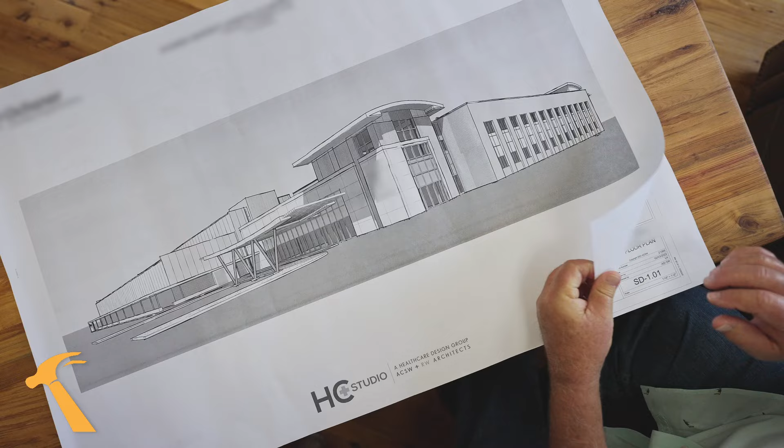Yeah, so Robert, let's talk about the project. Very excited to be a part of it. We've had a lot of discussion for the last 6 months about this project. I've built a lot of medical facilities in the past, but this project is far different since it's much, much larger.

And being that it's a renovation, creates some other challenges. It was part office and part industrial. We had to remove the printing press, so that was a big challenge in itself. It's construction. You guys do it every day and I do it every day.

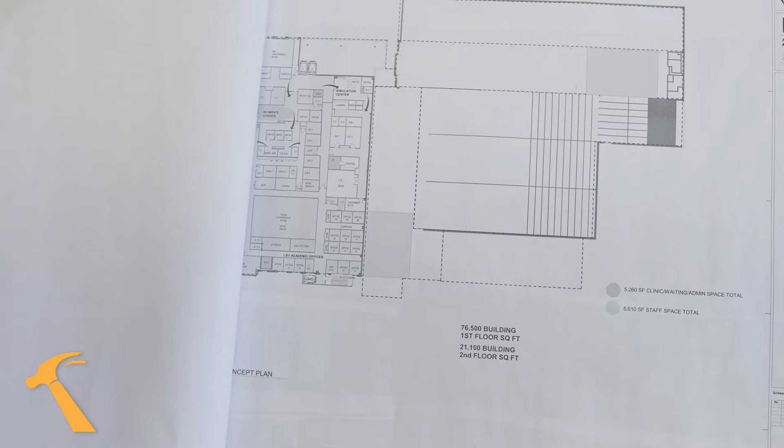I'm just on the other side of the fence from you. I know it's going to go well. I know we'll deal with the challenges. The city of Lafayette's easy to work with. So it gives me a good level of comfort dealing with your team and the team of architects and the team that we're involved with the tenant. Everybody knows what they're doing, what they're supposed to do, and I'm very familiar with most of the subs. So I think it's going to be a great project.

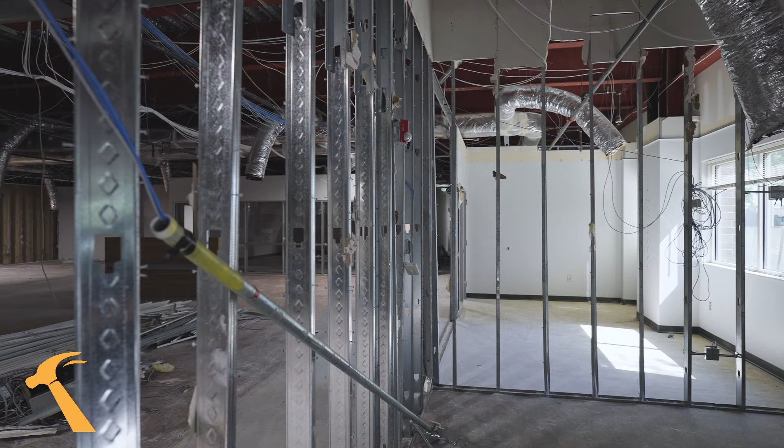I think it's going to come in fine, on time. I think we're ready to rip and roar, you know, and we've got the building almost gutted, so to where we need to be, so we're ready to go back up.

One of the things you said that really resonates with us is the subcontractors and trade partners and the team approach. There's going to be some complicated space in there for sure, just because of the nature of the medical facility. We're salvaging a building instead of tearing it down. And we're going to end up with a new roof, new air conditioning, new wiring, with the latest and the greatest equipment. So to me, this is going to be one of the most up-to-date modern facilities when we're finished here in about 18 months.

Absolutely. So I can't wait for the 18 months to come by for us to cut the ribbon with the tenant. That's the fun part, you know, walking in and seeing that end product and use and function the way it should, and knowing that we did everything we could as part of that team to make that happen.

Everyone involved in the project is anxious because they need the facility. Those people who are going to actually work in the facility are involved in the design stage, and I'm sure they're going to be excited when they really see something going back up.

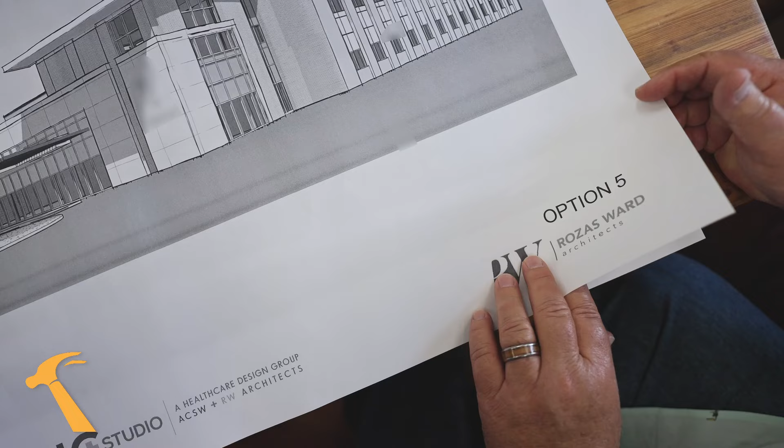Absolutely. Let's take a look at some of the basic concepts in this floor plan. One of the things that you mentioned was removing the printing presses, you know, and this is the first time I've interacted with a facility that had equipment like that.

We know for the first few weeks of the project, we're going to be working a lot in this back area to really fill some of those holes and embeds and really prep that space so that we can then frame the walls for the project.

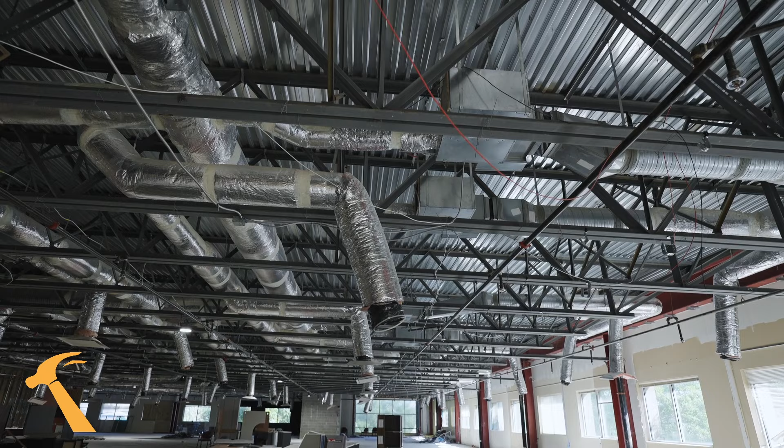In this printing press area, some of the concrete's 2.5 feet thick. That's a thick slab. That's going to create some challenges in itself for the plumbing. But with that said, we will have the most modern, environmentally friendly air conditioning system and of course the most modern, up-to-date LED lighting. So there again, the energy efficiency of this building completed versus as it was when we purchased it, is going to be completely different.

I've been involved from the ground up with the architects, and they spent a tremendous amount of time and energy and effort figuring out the flow. And what I mean by flow, the people flow. How big are the waiting rooms today versus how big were waiting rooms in the past?

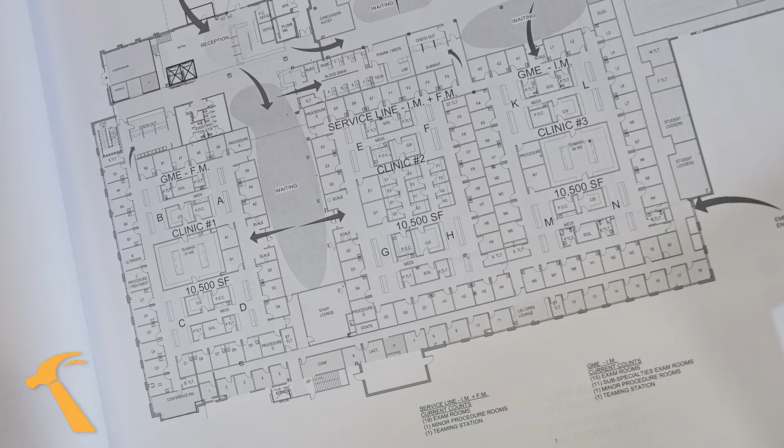We're working with a team that represents the tenant, and they're very sharp. They understand what they need, and they're conveying what they need to us, and so we can deliver the product. And that's honestly one of the hardest challenges on a medical building is the space constraint. So many regulations around the size of room, the layout of that room.

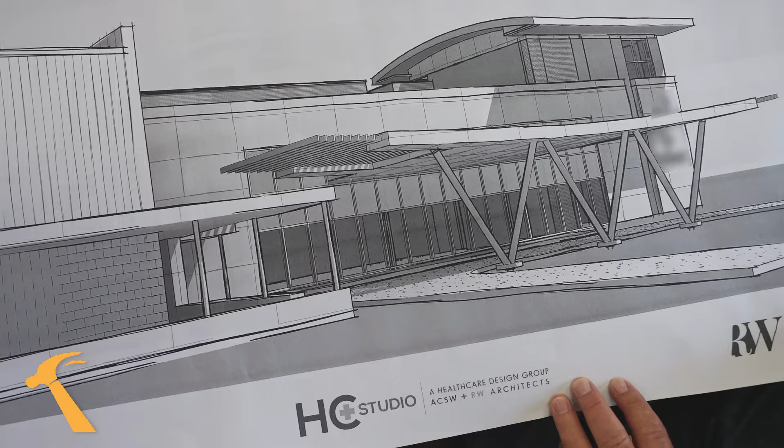Second floor, it's equally challenging with what's happening on the bottom floor. And then the exterior, so I like the look. It has the modern look. It'll get down the road 35 to 50 years with no real problems.

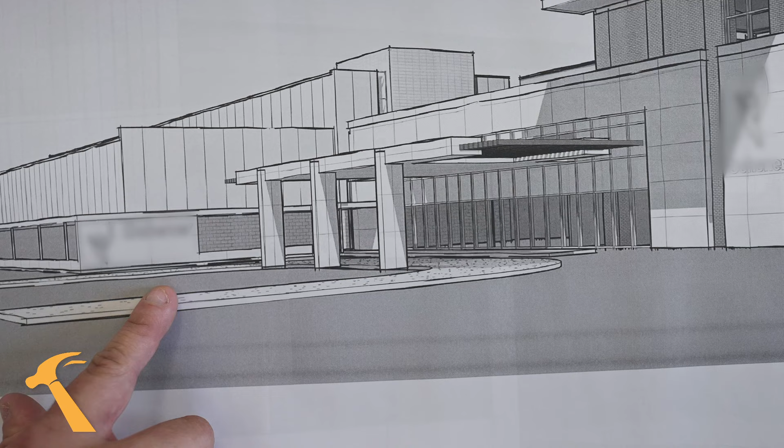Parking is a pretty good challenge, getting the traffic in, getting the traffic out. The architect and design team have really done a lot of work to maximize the accessibility for patients. We'll have a lot of exterior upgrades, some new drop-offs and canopies, and really that's where it goes beyond just planning a building. You're really looking for that patient care experience and what's in the best interest of the public and the community in some of these design elements.

This is a facility designed for somewhere around 1,000 patients a day. That's a huge part of the community too. From a service standpoint, you have so many different types of doctors that are going to be working in that facility and types of treatment that'll take place. You're touching a lot of family units every day, every day. I can't wait for y'all to get it done.

Well, we appreciate the opportunity to be part of the team and definitely enjoy working with this group. All right. Well, thanks. Thank you.